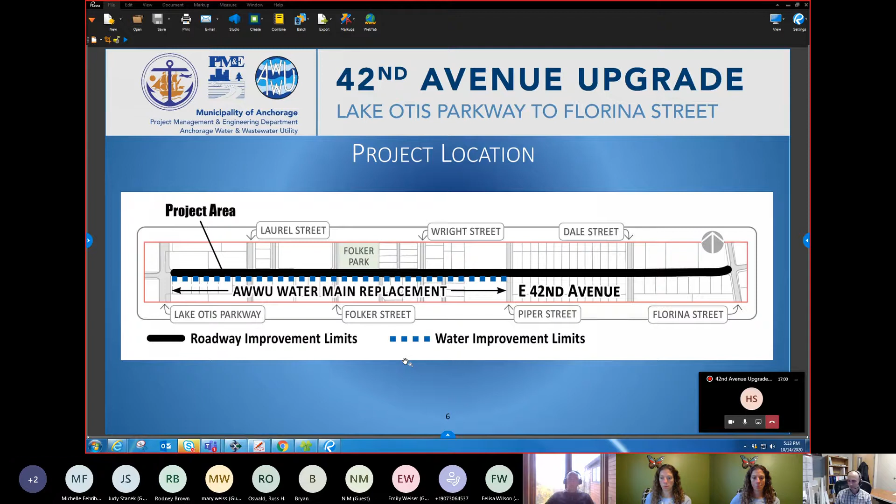So just an overall project schedule and timeline as to where we are and where we're planning to head: we recently published the draft Design Study Report back in June of this year, and we are between the draft DSR and final DSR, hoping to finalize that next month in November.

The project will then be put on hold for a little while as we wait for funds to start the detailed design. Currently the project design funds are on the MOA roadway bond, so pending that approval, we should be starting the design soon after.

From there, we'll advance into the 65% design, and we'll be involving the public after the 65% design to show everybody where we're at and get more comments and answer questions about the design.

We'll accomplish an agency review and then move on to pre-final and final design. We'll also have a public involvement event at the pre-final design stage to make sure we're keeping the public informed on how the project's looking and where we're trending on actual construction start dates and whatnot.

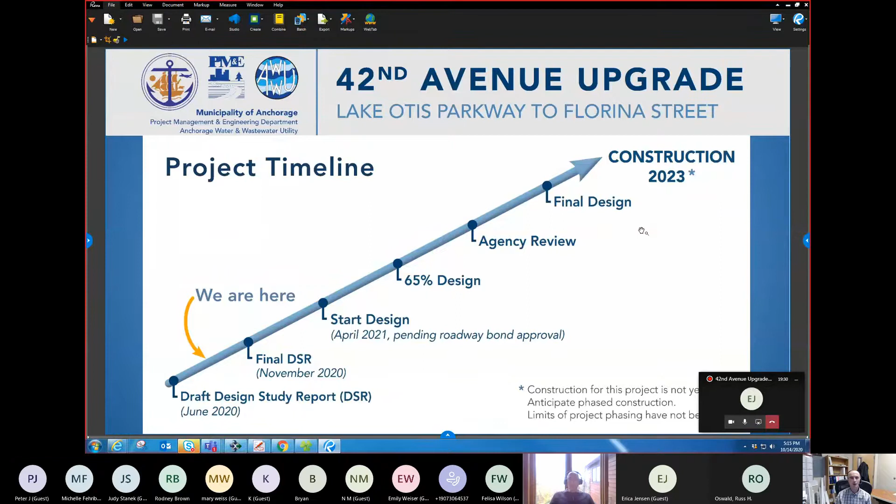The purpose of the project is to upgrade 42nd Avenue to meet current Municipality of Anchorage design criteria for a local roadway, and also to replace the existing water main from Lake Otis Parkway to Piper Street.

As you can see in this photo on the right, the project corridor is narrow with no pedestrian facilities, pretty unsafe for pedestrians and vehicles in some cases, and it has discontinuous drainage facilities and lighting infrastructure.

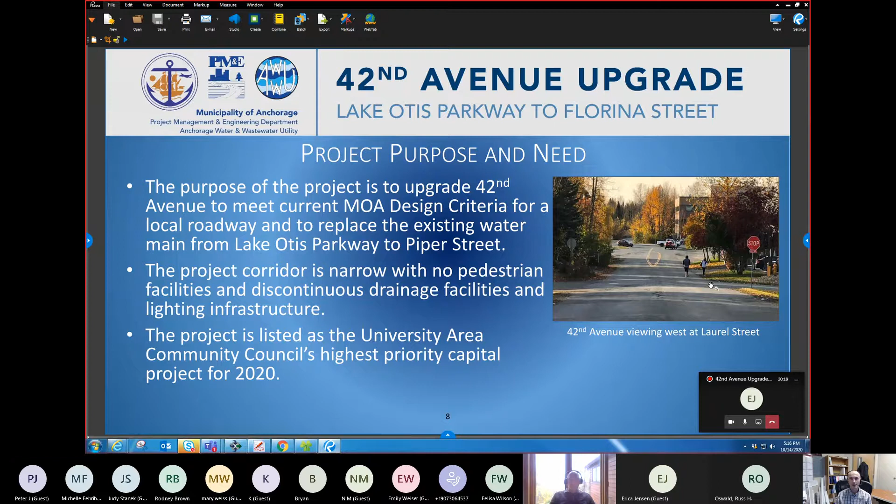Also, the project is listed as the University Area Community Council's highest priority capital project for 2020, and in past years as well.

This slide shows just a couple of existing conditions, not all inclusive. The items to highlight here are the existing right-of-way widths, which is basically the area that the Municipality of Anchorage owns and operates and is able to upgrade. It's 66 feet wide from Lake Otis Parkway to Piper Street, and then from Piper Street to Florina Street, it's 60 feet wide.

The posted speed limit out there is 25 miles per hour, and typically the roadway is a strip paved roadway. It looks a lot like what's shown in this upper right photo, where there's no curb and gutter, and obviously no pedestrian facilities. There is some curb and gutter east of Dale Street, with rolled curb and gutter along that section.

The only pedestrian facility out there along 42nd Avenue is along Folker Park, where the existing trail kind of meanders along the north side of 42nd Avenue. There's actually 4 distinct segments along 42nd Avenue, with different contexts where there's different land use adjacent to the roadway.

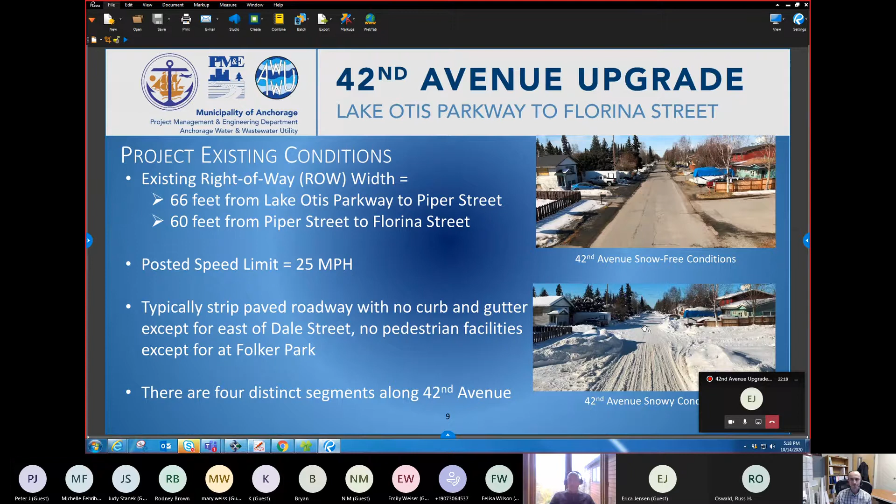The 4 distinct segments that we broke the project up into include segment A, which is from Lake Otis Parkway to Laurel Street, shown in the upper right corner here on the slide. It's mostly businesses with a few single family homes, and there are quite a few areas with full frontage driveways, which is not ideal for traffic safety and pedestrian safety along the corridor.

Segment B is from Laurel Street to Piper Street. There are typically some businesses, Folker Park on the north side, and then multifamily and single family homes along that segment.

The next segment, segment C, is from Piper Street to Dale Street, shown here in the lower right corner. As you can see, there's a high density of single and multifamily homes and a lot of driveways spaced close together.

And the last segment is Dale Street to Florina Street, with one business and lots of high density multifamily homes. That's where there's the rolled curb and gutter, and it's kind of a free-for-all with how people can pull in and out of their parcels. So not an ideal layout currently.

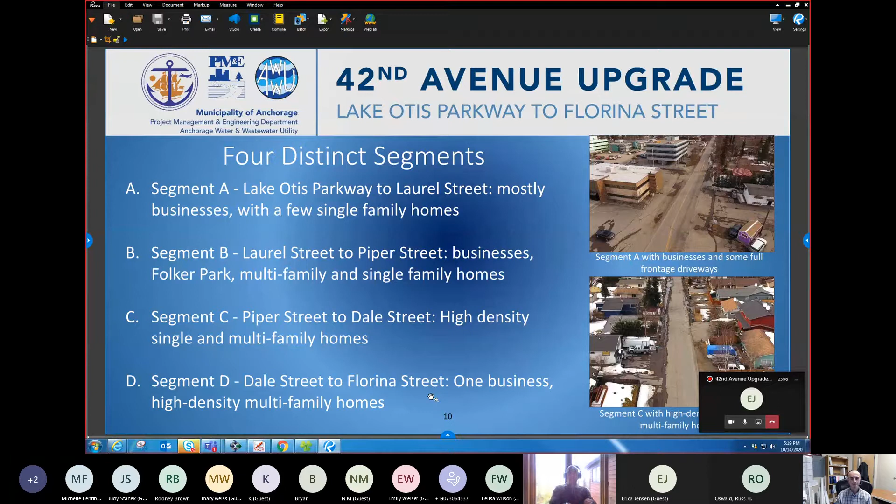So now I'm going to pass the presentation off to Erica to go over the draft design study report and the preferred alternative. Awesome, thank you Justin. Let me just start my presentation.

As Justin said, we published the draft design study report in June, and for each of the roadway segments that Justin just talked about, 2 different alternatives were presented and analyzed. Alternative 1 for each of the segments is the recommended preferred alternative, because we found that it best balances the various needs of the segment, be that multifamily, businesses, or single family homes, and those will be discussed in more detail as I continue forward.

We also looked at conceptual traffic calming and pedestrian safety types and locations in the draft design study report. These may change as we get further into the detailed design, but we have started to take an initial look at where these might be appropriate.

Other items that will be included in the proposed roadway improvements are an insulated roadway base that helps with the freeze-thaw cycle, as well as installing new pavement. We will have a piped drainage system to improve storm drain, and pedestrian facilities on both sides of the roadway. These are all items proposed.

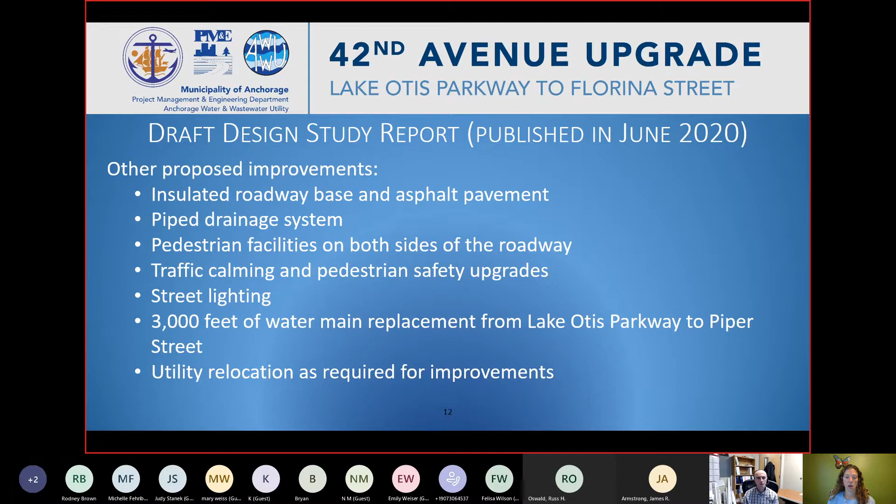Traffic calming and pedestrian safety upgrades, like I mentioned, improved street lighting, and as we've been talking about, 3,000 feet of water main replacement from Lake Otis Parkway to Piper Street. Utility relocations that will be required for improvements, electrical lines and other items, will also be included with the improvements.

Alternative 1, the proposed recommended alternative for segments A and B. We combined them as we got further into the design, as we found that they both had the same recommended analysis for alternatives 1 and 2. I presented here alternative 1. These are the proposed ones.

As you can see, we have 2 10-foot lanes with 3.5-foot shoulders on each side. We have a 5-foot sidewalk on the south side, and I'll show you a plan view in a second. There's an 8-foot pathway on the north side. Where feasible, we're going to separate the pathway and sidewalk from the back of curb. This shows the hydrant as well as the underground water line. We also have barrier curb and gutter, which means at driveways there would be a curb cut to indicate the designated driveway.

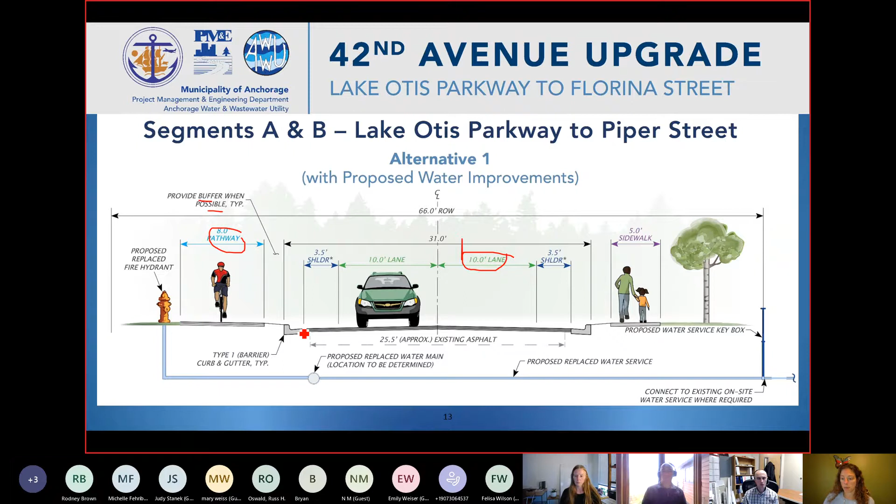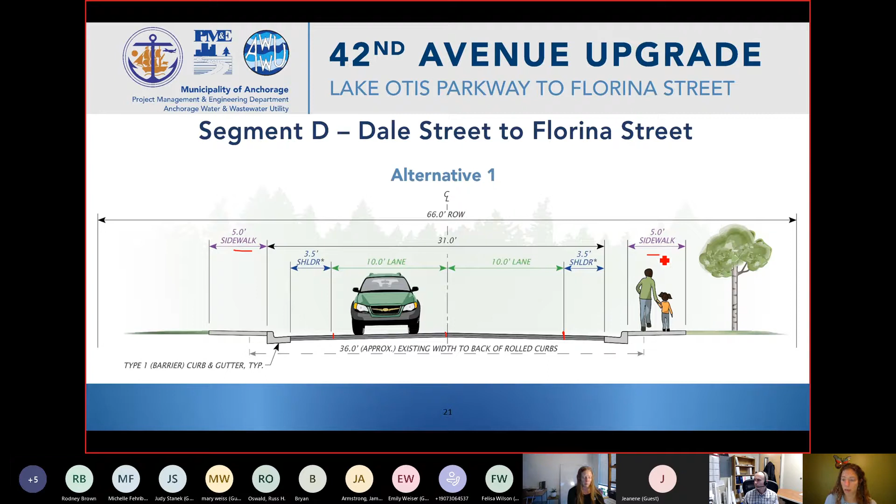There will be the ability to park on street, but again, we are not designating it as on-street parking. Because this segment has a lot of improvements close to the right-of-way, we are proposing to have the sidewalk on both the north and south side attached to the back of curb, to minimize impacts to existing structures close to the right-of-way while still providing pedestrian facilities for people who walk along this segment.

Here's our last segment. Again, we have a 5-foot sidewalk on the north side, as well as a 5-foot sidewalk on the south side. This segment is looking this way.

This segment had quite a bit of a challenge based on the year of construction of a lot of these parcels. We believe they might have grandfathered rights for non-conforming determinations, meaning in plain English that they might be allowed to have driveways wider than the current code. You can see a lot of these parcels have pretty wide driveways that span the whole length of the property.

As we get further into design, we will determine if this is actually the case and if we can accommodate that. These wider driveways, as you can see, a lot of them pull straight into their parcels and their parking. Other driveways that were constructed later do meet or can meet current code and will be reconfigured, such as here, where you can pull in from a designated driveway into a parking space and still meet maneuvering requirements.

However, parking spaces that are currently located in the right-of-way, for example we have some here as well as over here, will not be able to be accommodated since they're in the right-of-way, and that doesn't allow for proper maintenance or pedestrian maneuvers, which is something we want to provide in the right-of-way.

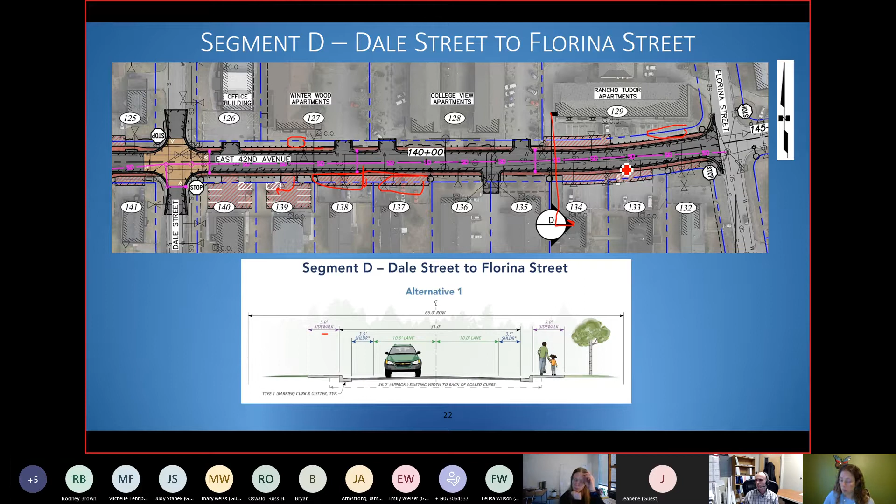Next steps: we will finalize the design study report. We will incorporate comments from you, the stakeholders, and the agencies that review it, such as maintenance and lighting. Then after it's finalized, we will route it for signatures and approval by the Municipality of Anchorage, project management and engineering - that's where Russ works - AWWU, and also the traffic department.

The design, like Justin mentioned earlier, is not currently funded. It is on the April 2021 bond package, so don't forget to vote for that. We will implement the preferred alternative identified in the design study report as we go forward and figure out all those other details like I had been talking about.

We will have additional public meetings after the 65% and 95% complete design, so you will still have the opportunity to comment and give us your opinions and questions.

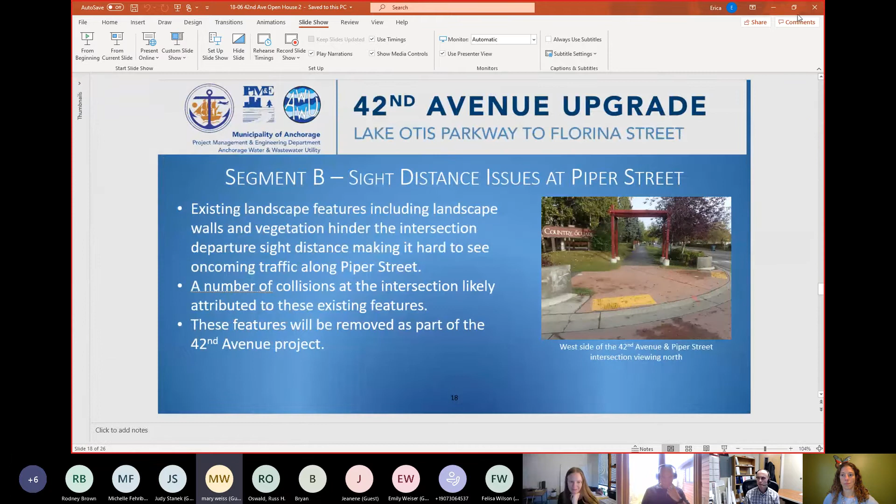Yeah, it's interesting. I wasn't aware of the raised intersection issue meant to slow traffic down, but since I've been here for a couple of years now, it's always been a problem. People go whizzing by, easily 40, 50 miles an hour. It's crazy.

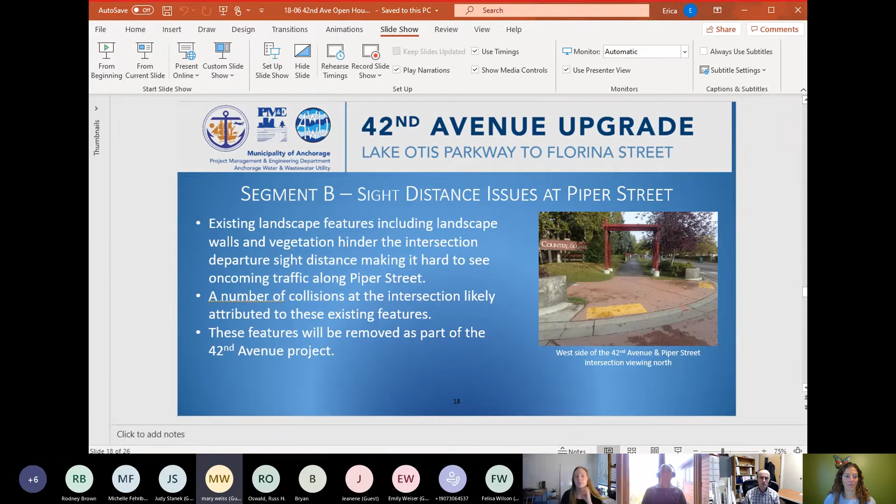And the other thing is, over the summer we had some road work and they installed a temporary traffic bump. It was actually nice—a few people probably tweaked their bumpers, but then traffic slowed down. I've talked to other people in this area, and they say that's the main problem, these cars just go whizzing by with no way to slow them down. I hope we can get some kind of traffic bump there, or whatever will work to slow these cars down. School buses, even empty ones, go by—they're really interesting to watch when they're that fast.

Erica, do you have a response to that? Yeah, we definitely will look at the most appropriate traffic calming feature. Speed humps have gotten mixed reviews—some studies show they do absolutely zero to slow down traffic, because you only get somebody slowing down right before the speed hump and then speeding up right after it.

And there are also reviews or studies showing they're really detrimental to the parcels located right next to the speed hump, because those get all the people slamming on their brakes before the hump and then speeding up afterwards. So speed humps come with a lot of different aspects we have to look at. That doesn't mean we aren't going to consider them.

We absolutely will, but they are a little more complicated than, say, a neck down or a raised intersection that doesn't have that stop-start aspect that the speed hump would have. But we will be looking at, for sure, what is the most appropriate traffic calming feature to install for each segment of the roadway.

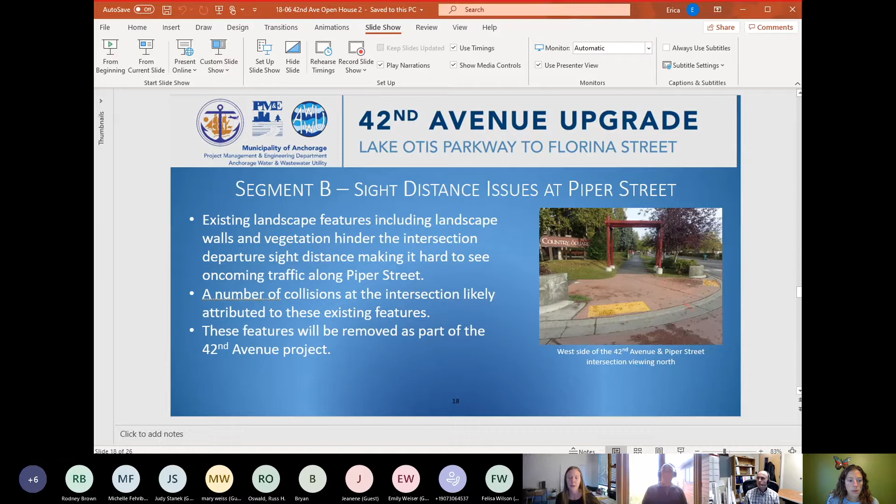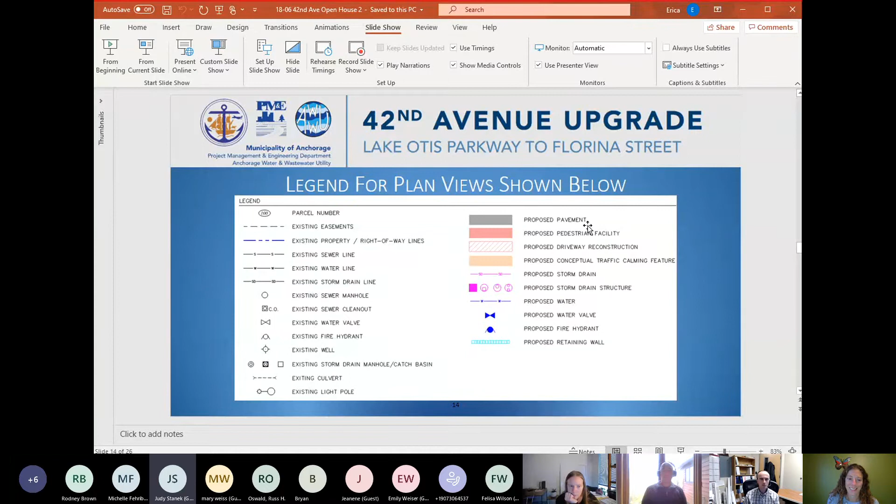So, Erica, the question is, what are the two black dashed lines adjacent to the road, which is the road right of way? Maybe if we can get a picture of... Yes, okay. Like here, I'm assuming the two black dashed lines are... blue dashed lines? Black. Go ahead, Judy. On your guide it says the dashed black lines are right of way, but you have two sets, see at the top, existing easements, but you have two black dashed lines parallel to each other. So which is the real right of way?

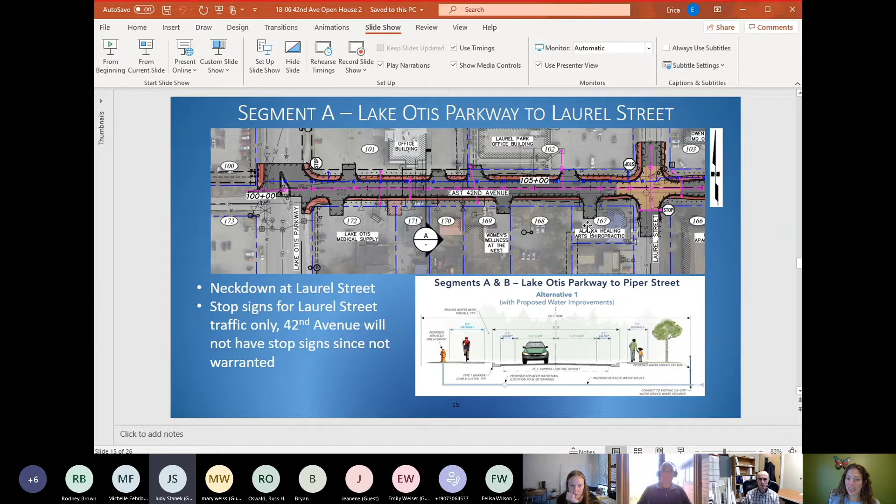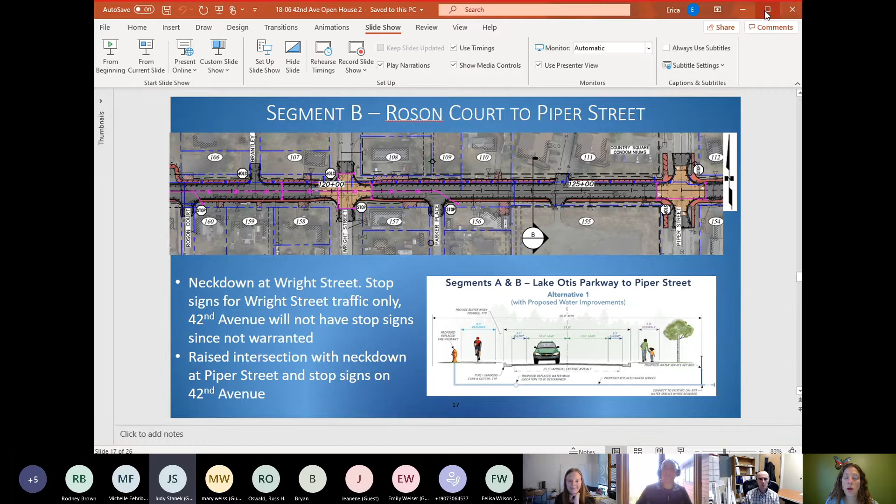There's some areas along... go to section B, that's the one I'm concerned about. Like here? Yeah, okay. Well, you can't see my mouse, I don't think, but what parcel are you looking at? Like parcel 108? Where am I? 111, I guess, 111. Oh, 110, okay, I see what you're asking. 110 is also very distinct.

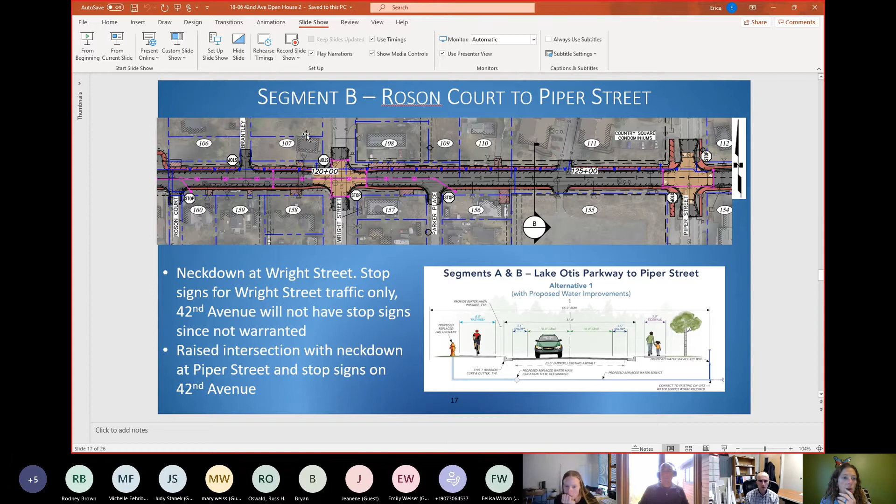There are some parcels along this right-of-way or roadway segment that have actually been -- I need to move to present from the current slide to get my pointer. So for example, right here, this blue line looks like it goes all the way to the center of the roadway. That's because this parcel 110 was designated per easement -- I'll probably get my survey term wrong, or per patent or per reserve. It was designated as right of way by a different legal method than, say, parcel 156, which was platted.

Wait a second, excuse me, but if you look at 110, you have the straight line you just drew, the red one, on the dashed straight lines, and right below that, before the pedestrian thing, is another dashed black line. So which one? Yes, yes, okay, that was my second point. Oh, I'm sorry, I wasn't following. No, totally fine -- I was also explaining that that's why some of these right-of-way lines are blue and some are black: some are technically designated per easement, not per plat, but they function the same way in terms of available right of way for the municipality, and also what the municipality maintains and is responsible for.

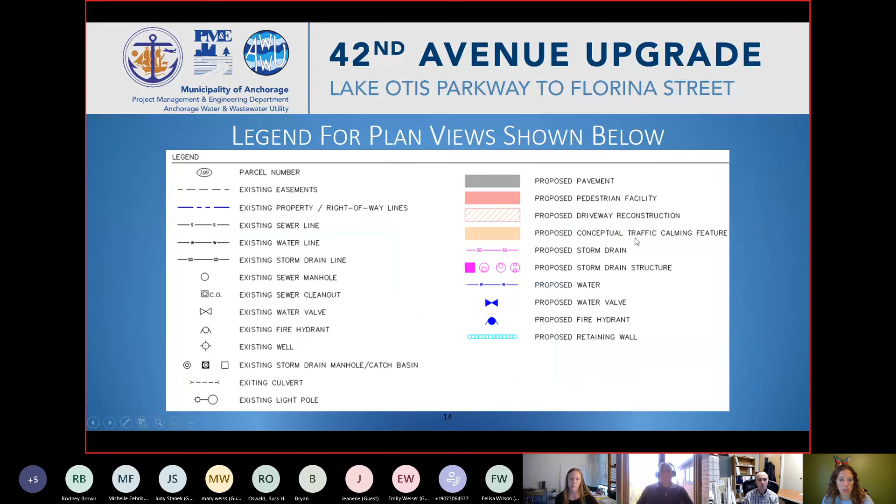This other black line that I now see you are looking at -- that's going to be fat -- this one right here, that continues over here. Correct, correct, that's what we call a cut line. So when we change the elevation of the roadway, we don't show it on that... The existing ground, for example, for a cut line, might be up here, and when we come in and do our improvements, we have to match this existing ground -- we can't just leave this like a hole. So this black dashed line that kind of veers in and out is where this limit is for where we're cutting.

Oh, you moved this. I was on B. Oh, sorry, you're right, I'll go back to B. There we go.

This little black dashed line, not as thick as the easement one, indicates where we have to cut existing ground in order to match. So if the existing ground is all the way up here, we're going to have to come in and do some grading and remove some earth in order to make our roadway improvements and construct them and allow proper drainage and other necessary things.

I'll add that you'll likely see road and ground disturbance up to that point within the right of way. That's a good way to put it.

Our concern is that there may be large mature trees in the way that need to not just be removed for your easement grading. That's really the concern I have. Right where your big symbol shows B, yeah, right in there are large trees, sort of above that.

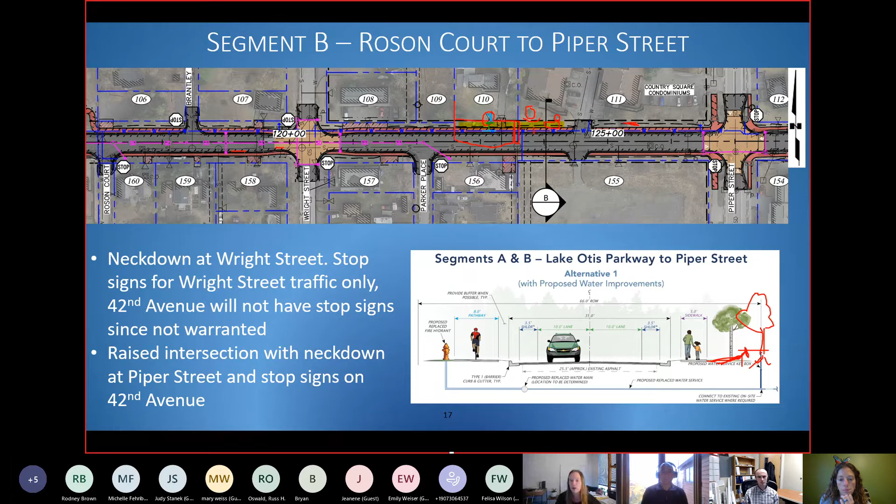Go ahead, James. Yeah, going back to the water mains, I always like to equate this to, we own a bunch of vehicles out there, our vehicles happen to be water mains. Some are made better than others. The part that we're replacing is like a 1980s car with a lot of mileage, and it's in poor shape and needs to be replaced.

The portion to the east of Piper Street is in much better shape. It's a 2000 model, it's got low mileage, and everything's looking pretty good with it. So we have basically two different types of mains, one's cast iron, one's ductile iron. One has a history of breaks, one doesn't. So one needs maintenance, actually in this case replacement, and the other one does not.

Okay, thank you, James. I think that answers it pretty good. Is there any other follow-up you want to add to that? Okay.

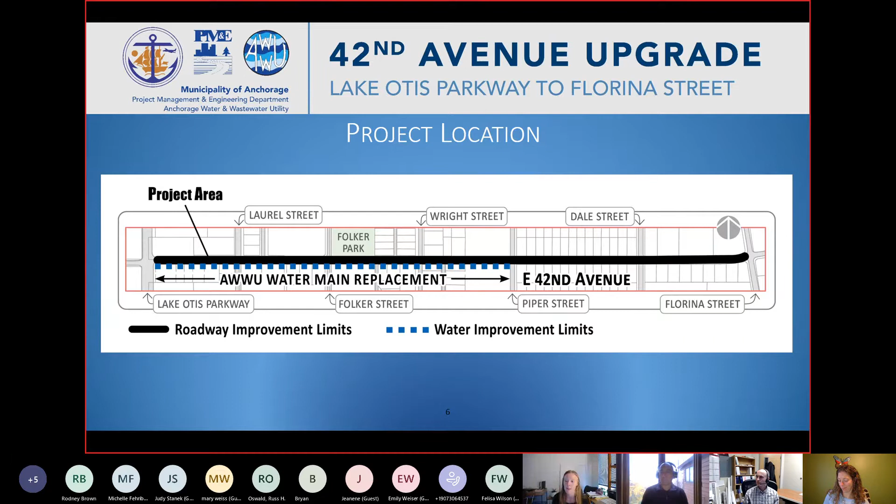All right, I'm going to move on to Bryan now. Regarding individual mailboxes between Piper and Dale, was any thought given to locking cluster mailboxes?

So glad somebody asked this question. Yes, there was. It is a preferred use, and for many reasons, safety, delivery, all these other aspects. Yes, cluster mailboxes are something I think most people would assume are the preferred alternative. However, to actually install a cluster mailbox, you would be very surprised at the logistical hoops we have to jump through.

Every single homeowner within the affected area, so you can see all of them in this area, has to agree to move to a cluster mailbox. If even one homeowner says no, I don't want a cluster box, then it's killed. There's no cluster box. It honestly doesn't frequently happen that you get complete 100% consensus.

There hasn't been everything worked out either on whether the post office then installs the cluster box, because then it's the post office's box, or is it the municipality's box, but it's not the municipality's system, it's the post office's system. So while it seems straightforward, hey, take these individual boxes and let's make a cluster box, it's not straightforward. And unfortunately, we have found through multiple projects where we have tried to do that, it has always been shot down and failed.

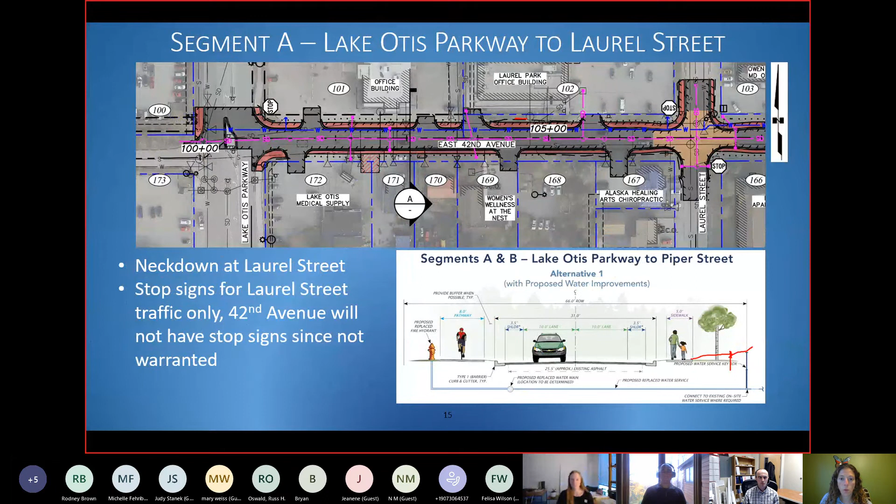So the reason we placed it on the north side was when we looked at the adjacent items, one of them that really stood out was Folker Park and Providence Horizon House, which does have a residence community. So that was our initial reason for placing it on the north side, was just to continue what is existing here with Folker Park and Providence Horizon House.

Okay. Any other follow-ups to that, Mary? No? Okay.

All right, I don't have any other questions in the queue. Does anybody else have any other questions or comments?

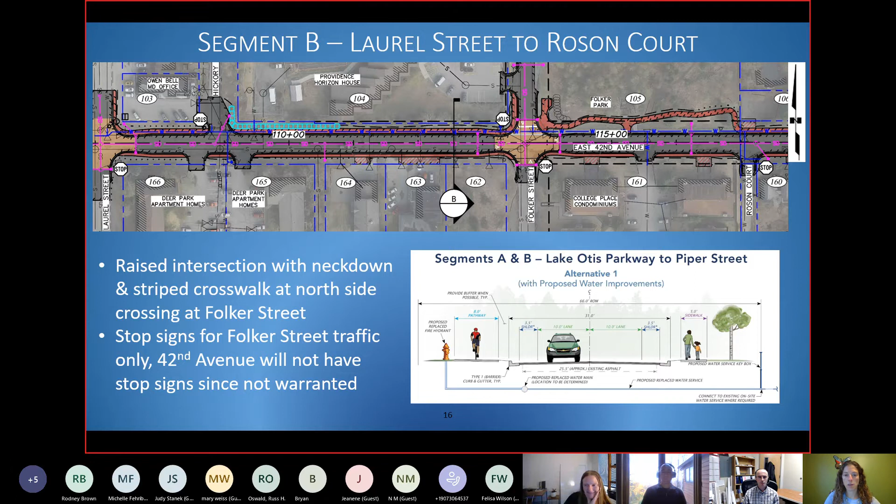I'll go to the last slide for you then, Holly. Okay, you want to take this one though? Okay, all right, we do have one more. Oh, perfect, Judy. Enough questions.

I'm not sure what kind of landscaping will be added. Oh, okay, I'm going to go back to that picture here.

So this type of landscaping is pretty involved. It's a gateway feature. We do know it was part of a bigger planning process for this area. This level of landscaping, functioning as traffic calming and representing the neighborhood, we don't anticipate along the project corridor. It is a local road, which per code doesn't require a specific type, style, or volume of landscaping.

However, we do know that landscaping will be impacted by our construction and our roadway and waterline improvements. I don't know exactly what will be installed, but normally it's a combination of trees, shrubs, and plants. One goal of the landscaping is to provide aesthetics, but also not to encourage places for loitering or sleeping or other uses we don't want to encourage.

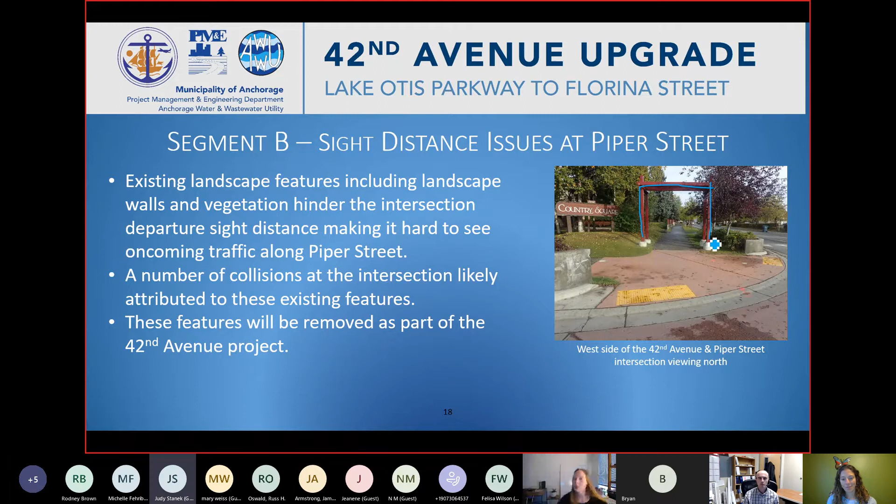You're welcome. Okay, Erica, can you move to segment C, please? I sure can. Okay, Rodney has another question, and he asks, why are 2 sidewalks and off-street parking required? That's a lot of pavement and might affect existing uses.

Yes, so actually what is required is wider than what we're proposing. If you look at the Muni Code and the design development requirements, a road like this, segment C, which is a local road with individual houses, actually requires 2 parking lanes and 11-foot wide travel lanes.

Oops, where's my mouse? Oh, my mouse is gone. Maybe I'm just on color white. That could be the problem.

So when we looked at it, as you mentioned, it would significantly impact the use and adjacent properties. So we proposed that we reduce it, that we don't do this other 7-foot parking lane. We make these 10 feet, which functions as a traffic calming feature with the narrower lane. So that's another additional benefit.

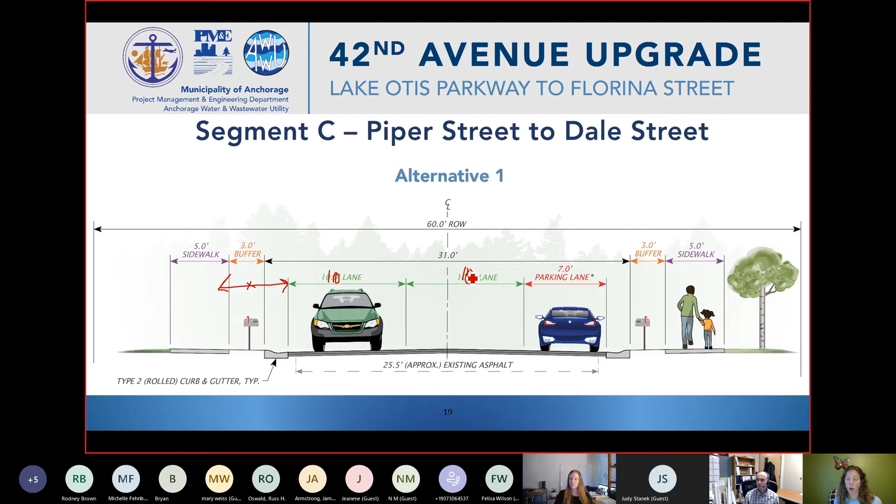Local roadways' intent is to provide direct access to the properties, and that includes being able to park near where you're going. So it's something we do want to provide, but knowing the area has a lot of established residential homes, some pretty close to the right of way in terms of their structure—you can see these are not that far set back—we did want to minimize the impacts to the area. So we narrowed the paved vehicular traffic area.

Another goal we had with this segment, along the whole roadway, was providing 2 pedestrian facilities. It is part of the requirement, but we've found in some communities that 2 pedestrian facilities, one on each side, isn't necessarily best for that context. For this area, we really did want to provide that double pedestrian access, since a lot of people here work in the U Med district and bike and walk. So our goal was to reduce the vehicular paved area while still providing what is appropriate, and making sure we provide 2 pedestrian facilities.

I'm not sure if I totally answered your question, so please let me know if you have a follow-up. What do you think, Rodney? Does that answer your question?